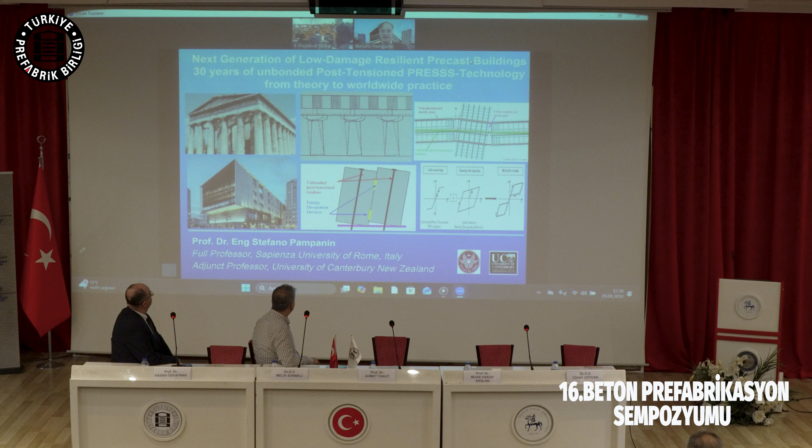So this is a road map of what I would like to give you, a little bit of a summary of quite a number of years, 30 years. But if you see on the left-hand side, this technology probably dates back 3,000 years, 2,500 years, depending on which country. The monolithic temples which were doing rocking could be considered. So everywhere in the world, people were using this sort of technology as a seismic resistance.

So we will be going in 30 years in a fast track summary, from the concept of rocking from the Greek temples, that's the concept of what they were doing in the past, to the concept of controlled rocking, using cables, post-tension cables. And by the way, marble is concrete, marble is prefabricated. So there was a prefabrication in the past which was quite advanced, made of segmental construction. And what we've been doing in the last 30 years is to engineer that very good earthquake resisting structure by using vertical post-tensioning in the columns or in the walls, and horizontal post-tensioning in the beams. What is the novelty? The post-tensioning to work as a spring, a controlling spring, so that they should be at least locally unbonded, not bonded.

And on the bottom side, you will see one of the buildings, which is probably even behind me as a screen, which has been co-designed and reconstructed in New Zealand. It's one of the latest low-damage technology, an iconic building, the Central Library, after the major earthquake in 2010-2011.

Professor Khan was asking me, can you please give a brief bio of yourself? And I was preparing a bio, then I sent a text, but the bio here is not really about the context, it's about a journey. And I would like to show you the journey of this technology using my story, because that has been basically my life.

So the first 28 years, University of Pavia, Milan. Why is this connected, linked to precast technology? At University of Pavia with Professor Macchi, my mentor, I was working on rocking of the columns of the Leaning Tower of Pisa. So it was already looking at finite element modeling and trying to understand how this mechanism can actually benefit. The rocking of the columns of the Leaning Tower is actually a pure rocking, there is no control.

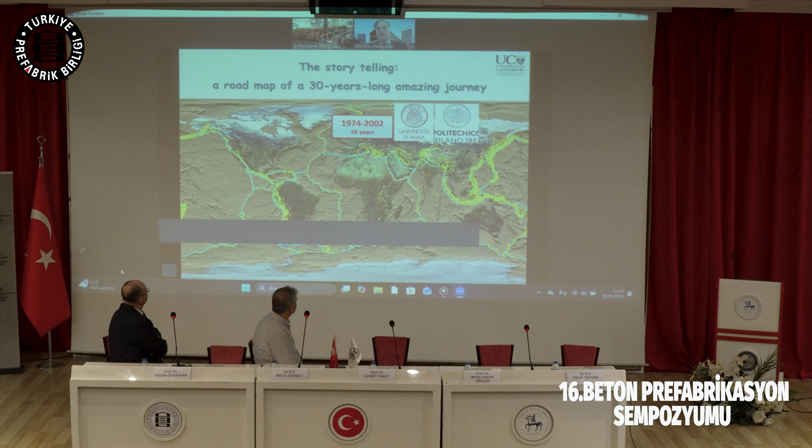At the Technical University of Milan, where I did my PhD, I spent as much time as I could working, having the honor to work with Professor Nigel Priestley at University of California, San Diego. That's where it all started in terms of learning the ropes of precast seismic structure systems, which is the PRESSS technology.

I came back to Pavia for a couple of years at external lectures. I had the opportunity to go to New Zealand for 3 months, invited by Professor Park, informally, and more formally by John Berry, who was our technical engineer. The 3 months became 16 years. Over there we really pushed very much on developing further and further, with several applications, the technology itself.

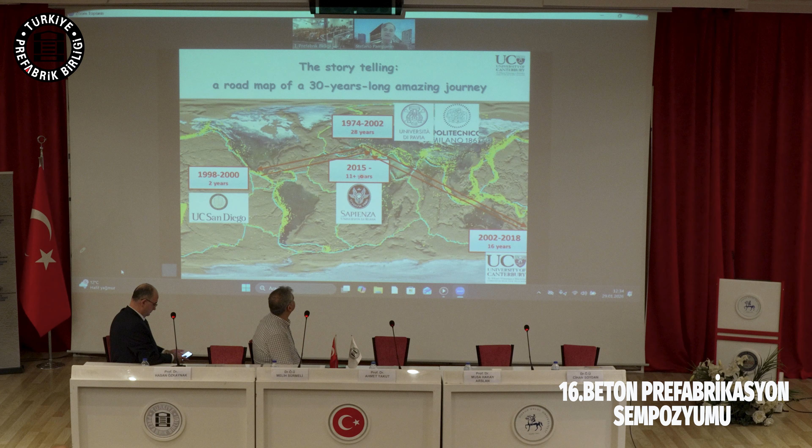Where I'm calling you from now is Italy, but not from Pavia anymore, it's from Rome. In the last 10 years in Italy we've been working on a combination of low damage with energy efficiency - low damage for new design and energy efficiency for both new design and retrofitting of existing buildings. We are using low damage technology, and then combining it with energy efficiency.

Now, I assume, looking at your very interesting symposium, that during the 2 days you have been going through the development of precast in seismic regions, but I want to give a snapshot of what was the situation in the 1990s and what is typically the situation today.

In the 1990s, the situation was not very different from now. The use and development of precast was limited. There was a lack of confidence on the performance - the Northridge earthquake, precast car parking, industrial buildings, I'm sure in Turkey too - we know we had problems with car parking everywhere, precast concrete industrial buildings everywhere.

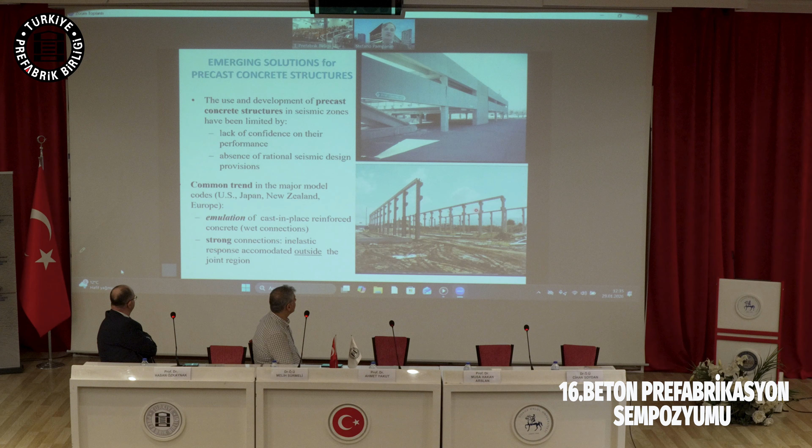Unfortunately, the 1999 earthquake in Turkey was a wake-up call for everyone. There was a lack of seismic design code provisions, a lack of university courses, a lack of information in the area of engineering and architecture.

The trend in major codes - US, Japan, New Zealand, and Europe - was typically to allow precast concrete only if you were doing an emulative approach, a cast-in-situ approach, so a wet connection of precast or semi-precast elements, or a strong connection. The hinged connection, as we could call it, is the typical precast industrial building approach as we were doing in the European environment, Southern Europe, and everywhere else in the world.

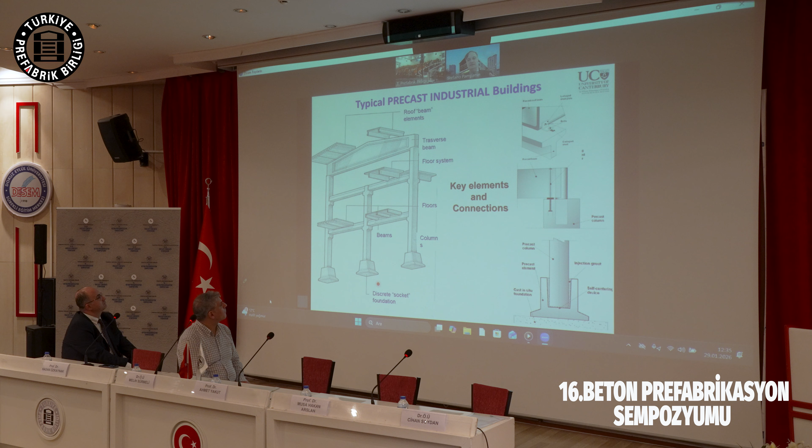It's very strong, very efficient from a gravity loading perspective, but not very good from seismic resistance - and we learned that. What are the advantages? Fast and quick, it's dry, it's fast, it's quality controlled. So with a dry connection we have all the benefits of precast - speed of erection, everything goes up like a Lego system. But if we have connections typically hinged, with a couple of rods vertically and a socket foundation, we have a very inefficient static scheme.

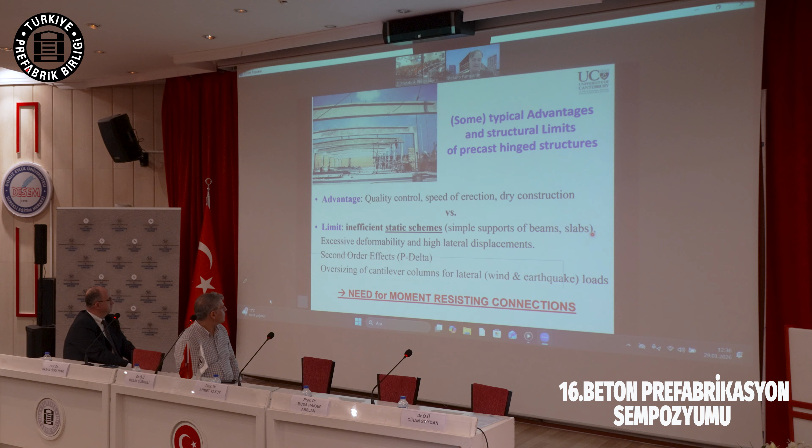So basically we have to over-design the foundation, over-design the column because they become cantilevers. We need to limit the displacements, we need to limit the deformation. So the whole system under seismic regions doesn't work very well. We like dry connections, but we need a moment-resistant connection. That's where, over the decades, the emulative approach came into place.

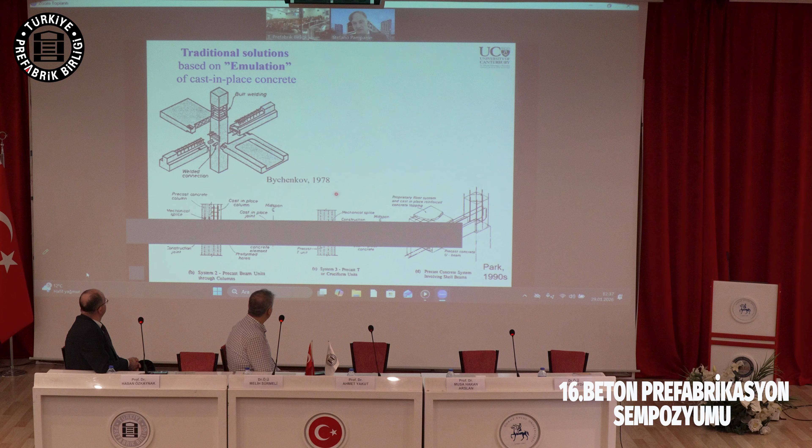Because we needed a moment-resistant connection, there's been a lot of development of the emulative approach. You know this well because Turkey is doing very well, but I'm speaking about the world. In the ex-Soviet Union, East Europe, there was already in the 1970s precast wet connections. New Zealand in the 1990s, Bob Park et al., precast connections cast in situ, wet, in some regions. This is a publication from FIB by Fumio Watanabe showing that in Japan, and also in approximately all the FIB countries, precast connections were cast into the core of the joint, or at the midspan of the beam, or somewhere far from the beam - so we were having cruciform elements or beams supported on columns.

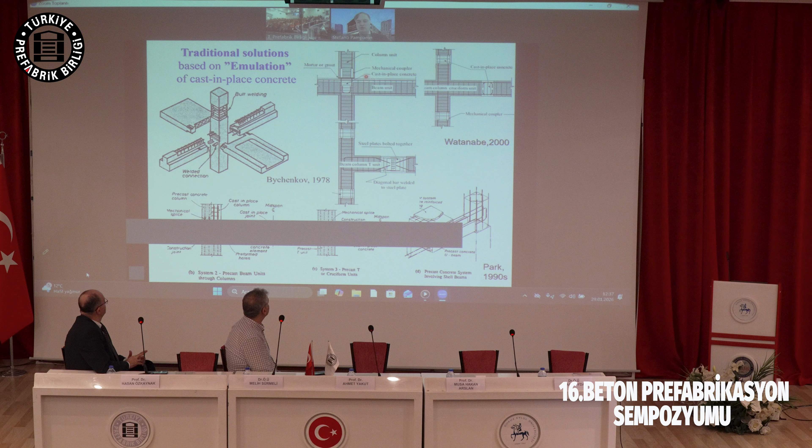Examples we know well: double cruciform vertical in New Zealand, double cruciform horizontal in New Zealand with the wet connection. This, from FIB, refers to the Turkish approach - very good - for precast concrete industrial buildings, where there are wet connections instead of only dry connections.

So all very good because we are giving a moment-resistant connection, but how do they perform in a real earthquake? Well, they will perform as cast-in-situ concrete performs - they will try to develop a plastic hinge, they will try to develop a mechanism for ductility in the wet connection or the emulative connection itself.

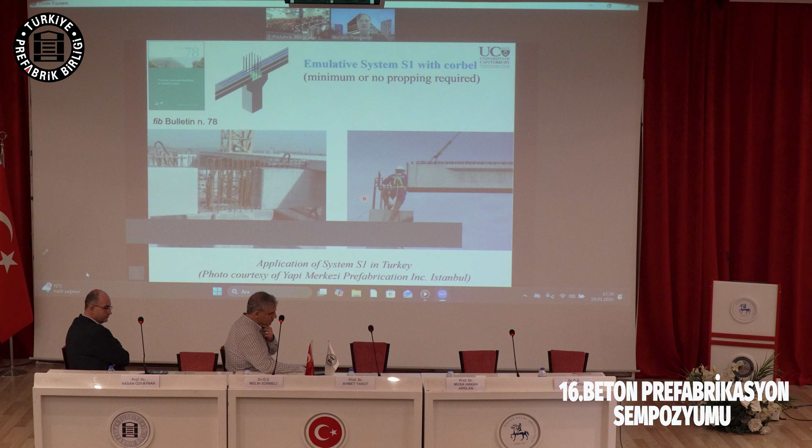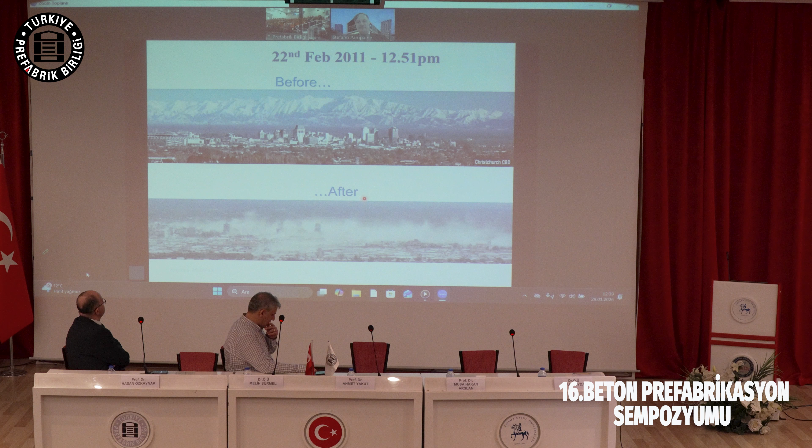And we had, unfortunately, a very important experimental test that we didn't want to have, in 2010-2011 in New Zealand. Christchurch, New Zealand - the city was destroyed in the central business district by this major earthquake, especially the aftershock of 22nd February 2011. So we are 15 years after - on 22nd of February 2026, in a few weeks it will become 15 years after.

This is one of the best slides that I've been showing for years, literally for years, starting from the 1990s, to speak about the fantastic examples of prefabrication emulative that New Zealand was able to develop around the world for a 22-story building. This building went through the earthquake.

How did it perform? It did exactly what it was meant to do. It developed a plastic hinge, so again it's a precast emulative approach, which is emulating cast in situ, is going to form a plastic hinge in the beam, is going to deform and provide ductility through damage. So by having ductility through damage, we are saving lives.

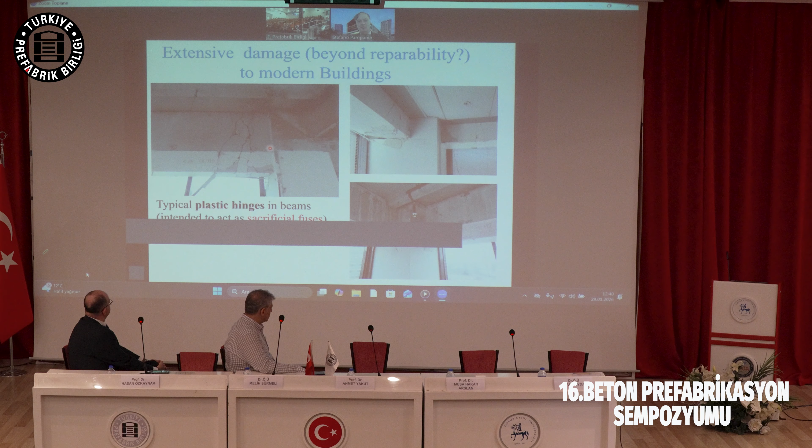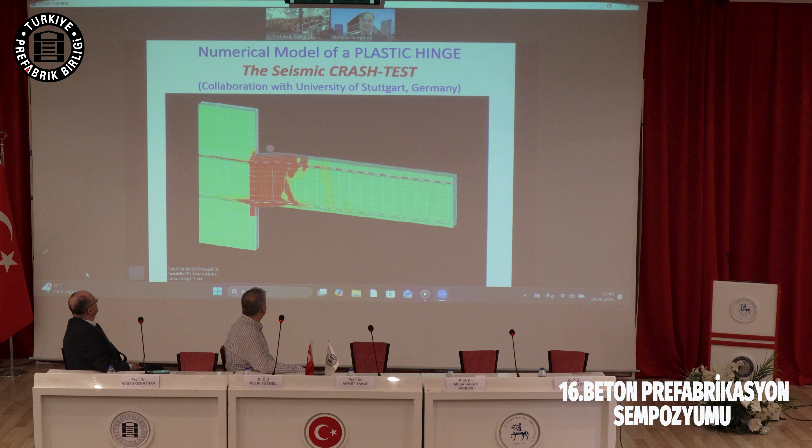So these plastic hinges were the sacrificial fuses of our building. But what was the consequence of it? The consequence was to have a car crash test. A building like a car crash test will deform plastically, and this means that we are not able to repair it. As a consequence of something that we can model, the seismic car crash test, people should know, or if they don't, we need to tell them that we are able to model the plastic hinge.

This is the seismic design of the minimum by code in all the best codes around the world. What happened to that building and to many other well-designed buildings according to a well-designed, well-detailed plastic hinge? Those buildings had to be demolished because we did not know how to repair a plastic hinge.

So let me go back. Precast is fantastic. Precast pre-stress can give you an excellent quality control, a speed of erection on long span. But in seismic regions, we discovered that simply supported beams on columns, socket foundation alone, are too flexible. We need moment resistance. Moment resistance can be provided by cast in situ, wet connection, emulative of precast connection.

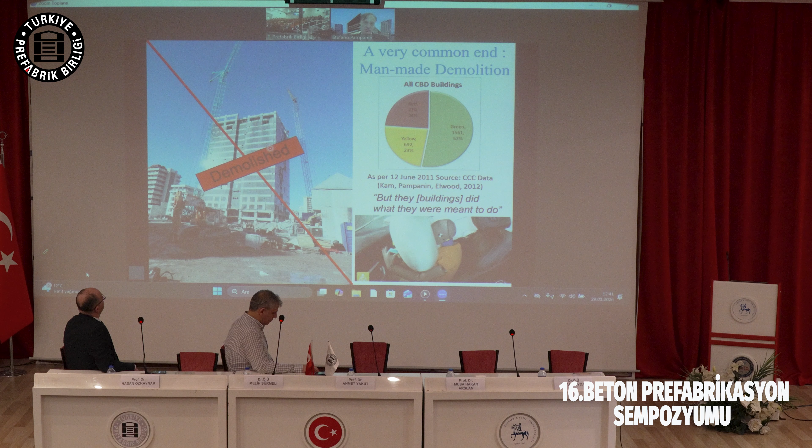But once we get a real earthquake, we get to the same problem of cast in situ concrete, which is developing a plastic hinge, which means that we are not able to repair it. So imagine the cost of a multi-story building like this.

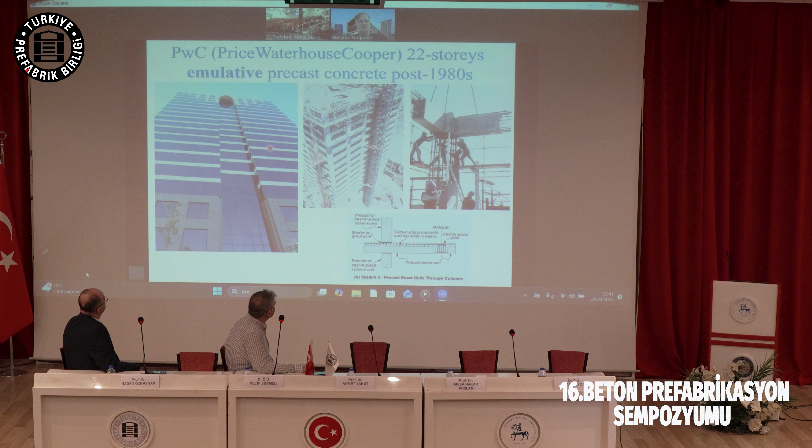This was actually an 80 million New Zealand dollar building, and it was not possible to repair it. So the loss is humongous.

And if you have insurance, which I know Turkey is also developing, you might be fine financially, but you will not get your life back with the insurance. Not in the sense that you have lost life, but in the sense that the comfort of your living will be completely destroyed. And that's the city.

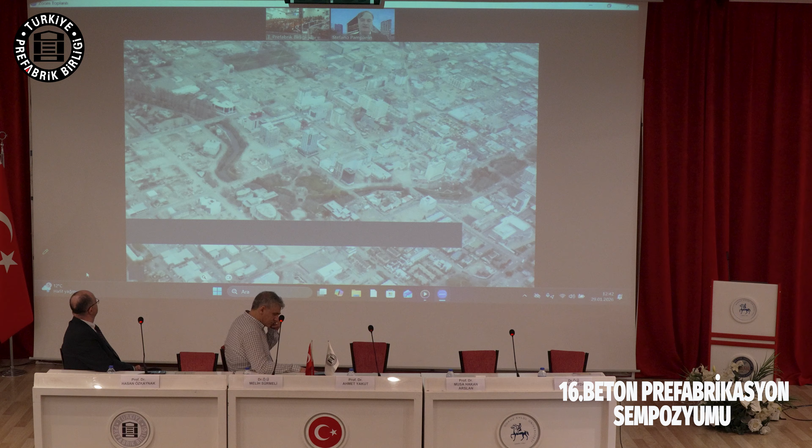The city of Christchurch, completely underdeveloped, completely taken down by controlled demolition, with 185 fatalities and 50 billion New Zealand dollars of cost, which means 30% of the gross domestic product.

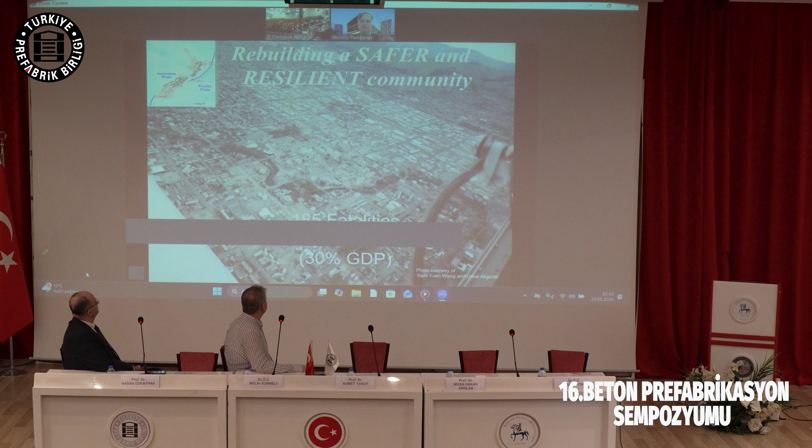It's to go back to the past, and we go back to the ancestors. They had earthquakes, they developed temples, buildings, made in precast. It's not concrete, but it's very similar to concrete. There's no steel inside, so it's only acting as a rocking system. I have all the links that you can use for references of this video and explanation.

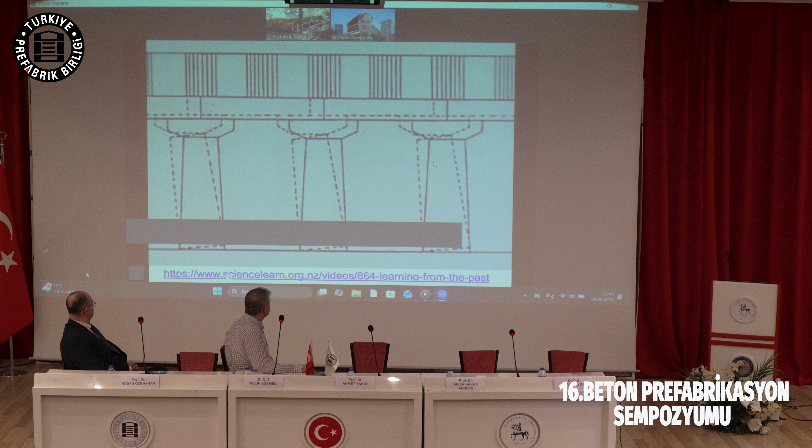This was becoming part of, as I mentioned, my thesis on rocking with finite element in the 1990s. And then the point is, can we learn from those technologies and use them in a new generation of low damage precast concrete technology? And that's what happened in 1999.

So in the 1990s, the Precast Concrete Institute in the United States, PCI, developed a new program, a big investment to launch, to revamp the use of precast concrete in seismic regions. Because precast concrete was losing market. People were not happy with the performance of simply supported beams on columns, hollow cores, not properly detailed. The problem was not precast, the problem was detailing.

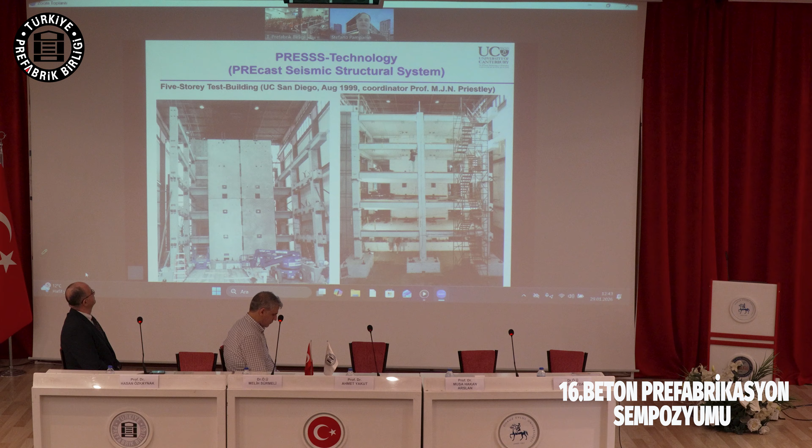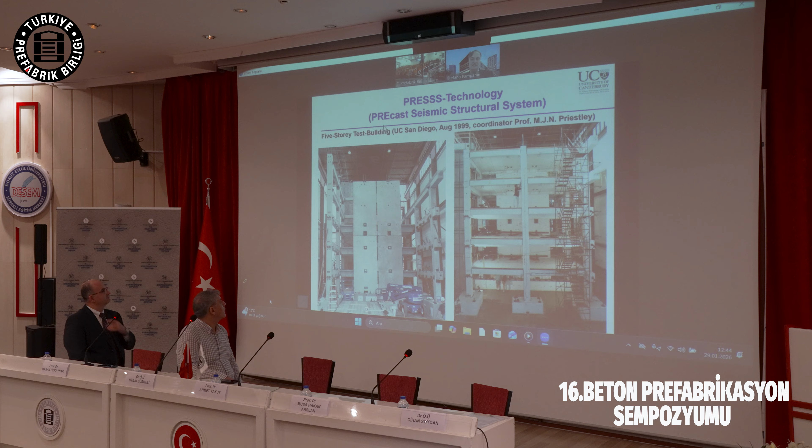The problem was connection. So this is an example, this is the end of the PRESSS program. That's why we call it PRESSS technology. PRESSS stands for Precast Seismic Structural System, coordinated by Nigel Priestley. I had the honor, 26 years ago—myself 26 kilograms ago, I joke all the time—many years ago and many kg ago.

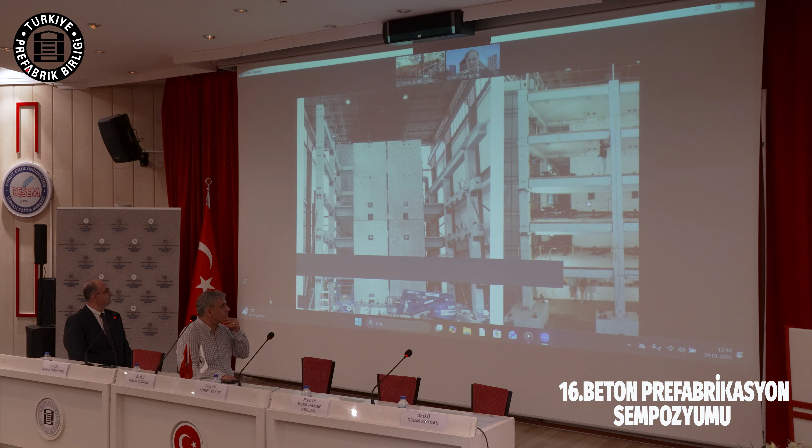And these are precast panels with vertical post tensioning, and these are frames with vertical post tensioning. Everything is unbonded. So how does it work? These are dry, jointed ductile connections. They are dry, not wet, using all the advantages of prefabrication in a dry manner. They use post tensioning to clamp the system against each other, and during the earthquake there is no forming of the plastic hinge, but there is a rocking.

There is a controlled rocking. Why controlled? Because the more you open the gap, the more the cables will stretch and push back. They act as recentering springs. That can be done for beams and columns, for frames, and that can be done for walls.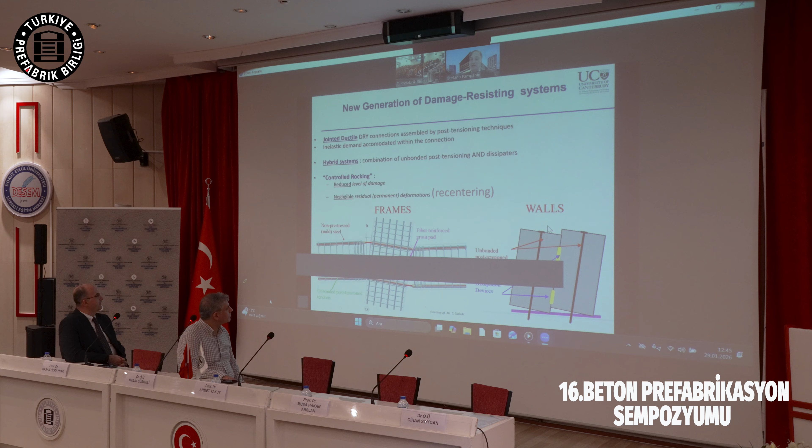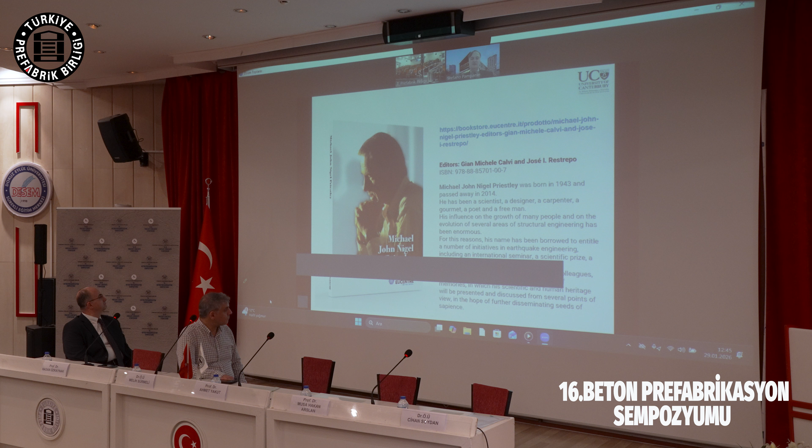I hope you know one of the most cited publications in press technology in this environment, which is Priestley et al., with Sri Sritharan, John Conley, and myself. I was a Fulbright visiting scholar at that time at UC San Diego, and these are the preliminary results of these 5-story precast concrete buildings, which worked outstandingly. If you want to know more about the story of that 5-story building, read the book.

That's a big group of academics, engineers, colleagues and friends of Nigel Priestley who prepared it after his departure, because we wanted to say how much he had impacted the whole environment in terms of science, but also in terms of people, giving credit back. In one of the papers, I was coordinating the story of the Press 5-story building, how it happened, working together with amazing teams like John Stanton, Suzie Nakaki, and so forth. I think it's very interesting to understand the evolution.

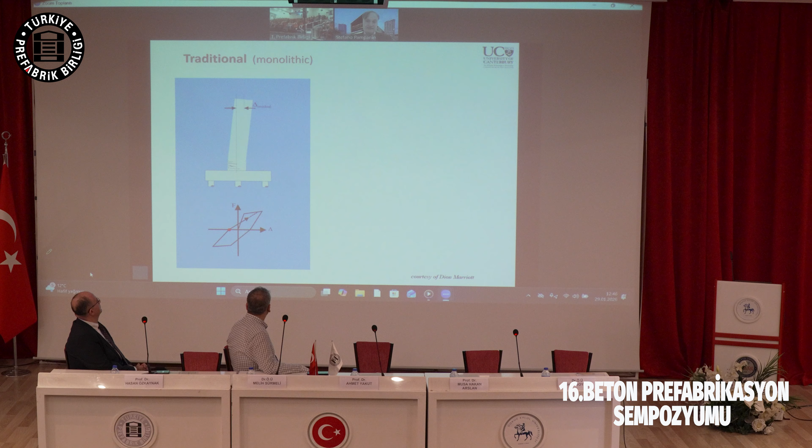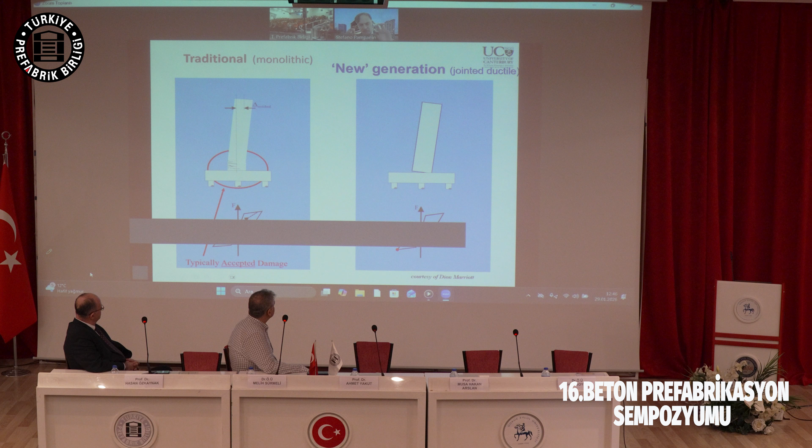So how does it work? The traditional cast-in-situ or wet connection, emulative approach, will have to form a plastic hinge, and then we don't know how to repair it, or it's going to be very expensive. A rocking temple with controlled post-tensioning and dissipation will have a sort of flag shape. So it's going to open and dissipate through either internal or external mild steel bar type dissipators.

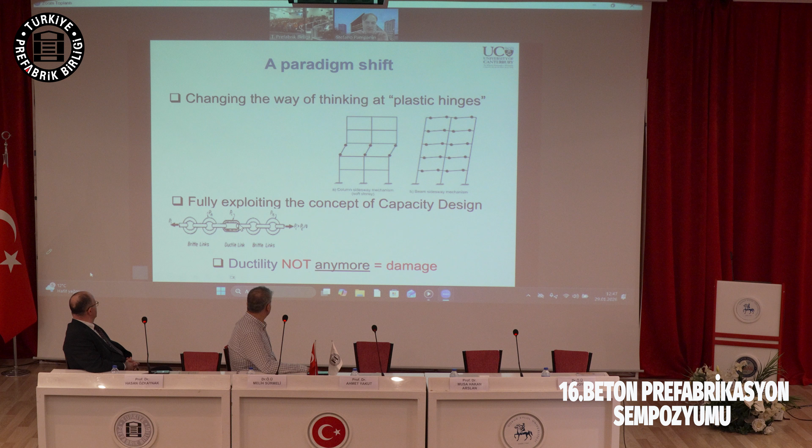The new way is that in the past, in the 1970s, thanks to Park, Paulay, and Priestley, we learned how not to allow buildings to collapse in a soft story, because of capacity design. The column being bigger than the beam, shear being stronger than flexure, creates a fuse in the plastic hinge in a flexural behavior. That was the famous theory of the chain, Tom Paulay's theory, saying there is a weakest link of the chain. The weakest link gives the strength to the chain. The force you can pull a chain with, the capacity, is the weakest link. So if we design the weakest link where we want, then we will have a ductile behavior.

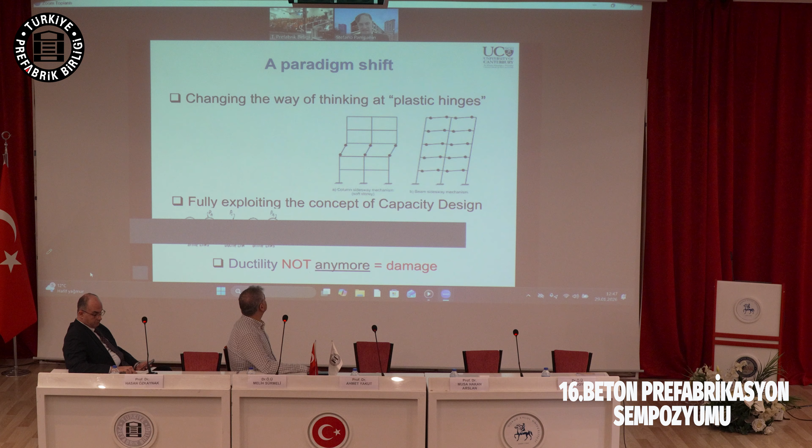But capacity design stands, and the technology has improved. The new technology allows us not to fail a building anymore post-70s, not to have a plastic hinge anymore, but to have a rocking low damage solution which won't leave an irreparable building. There is a new generation now, starting from the 70s, which was a major milestone in earthquake engineering. In the 90s, I'd call that another major revolution, the next generation.

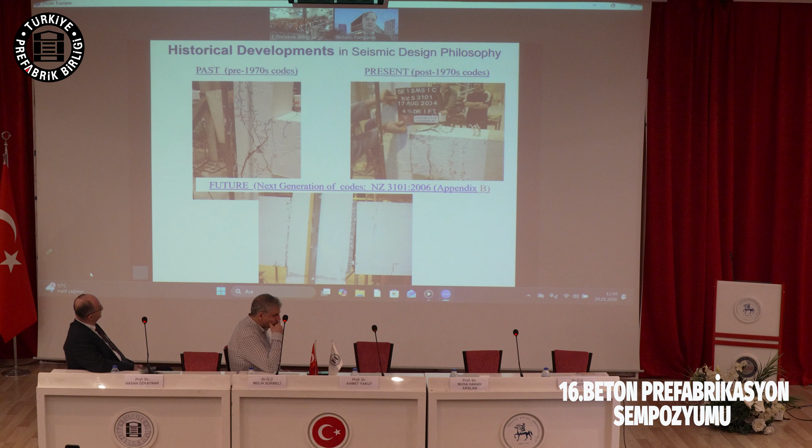What did we do around the world? In New Zealand, in Canterbury, over 16 years, I pushed a lot with my team. It was a fantastic environment, and we developed the next level up, a fuse which can be replaceable. If you leave the bars inside, after you heat them, you don't know how to repair them. So you can move the bar from the inside to the outside.

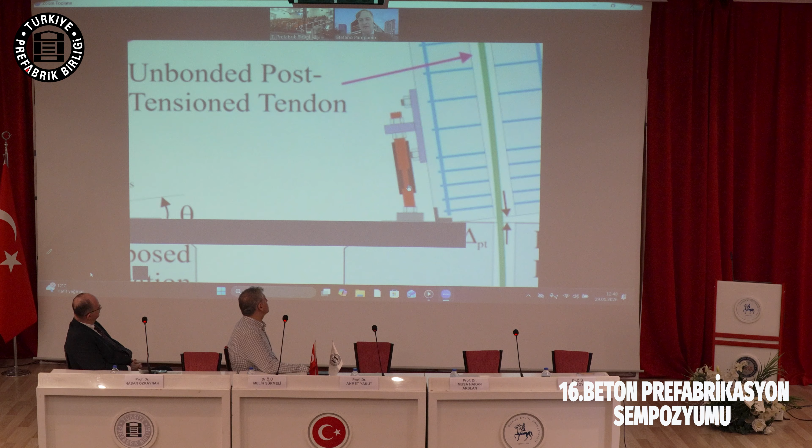You can give that bar a fuse type, a fuse shape. You can insert it into an anti-buckling restraint. Basically it becomes a big BRB, buckling restrained brace, conceptually, which has a plate. In our case, we use a simple rod, made smaller and smaller to become a small dissipator.

We call it plug and play. I decided not to protect it, not to patent the solution. So I'm still a happy, poor academic, because I decided not to make any IP protection, on one condition: please use the name we gave this technology baby, it's called Plug and Play. My name is Stefano, please call me Stefano, because my name was given to me by my parents. So please use it, it's free of charge. How much does it cost? 15 euros. We can manufacture it in the lab anywhere, in a very simple way.

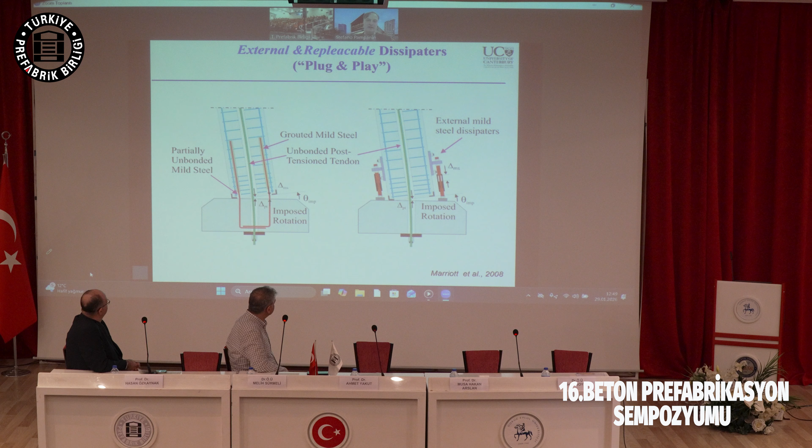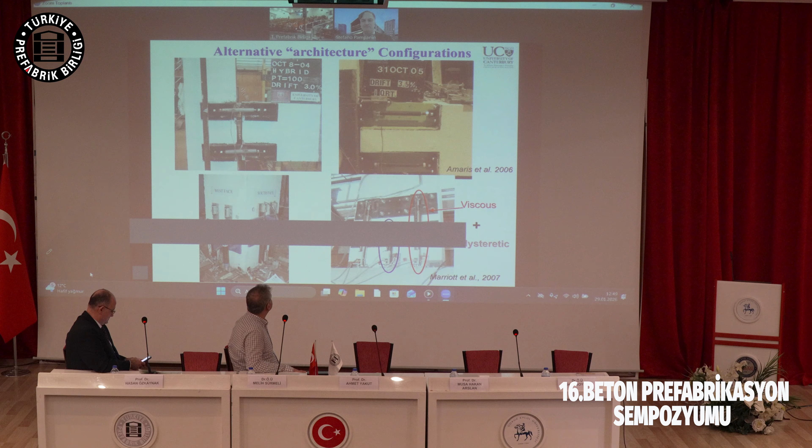This gives you the possibility to plug and play the dissipators easily in a socket, if you wish, at the bottom of the connection. They can be hysteretic, or you can use viscous dampers of different sorts. Their behavior is basically like designing a fuse with buckling restraint, with a cylinder, a fuse, and if you push it back and forth, you get a very stable behavior. They can become an architectural feature. Imagine your building, like what you've already been doing well in Turkey.

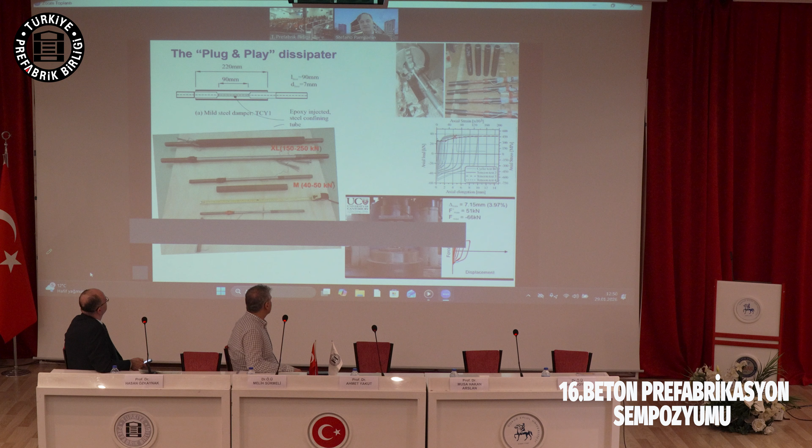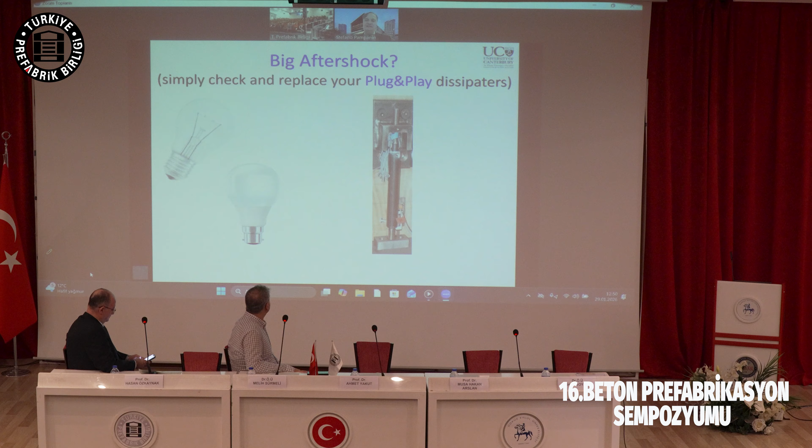There can be space to have some of them in some location around the building. Just as it's easy to change a light bulb after anything breaks it, it's easy to replace a plug and play. So the idea is earthquake engineering with a very simple implementation.

People have been asking, and I know that in Turkey you've been pushing a lot in 2018 with a code on precast, which would allow post-tensioning to be applied. Fantastic, thank you for doing that, it's great to know.

Let's see what was happening in the past. In 2004, the FIB bulletin 27, led by Bob Park and Fumio Watanabe, was already introducing the concept of precast technology.

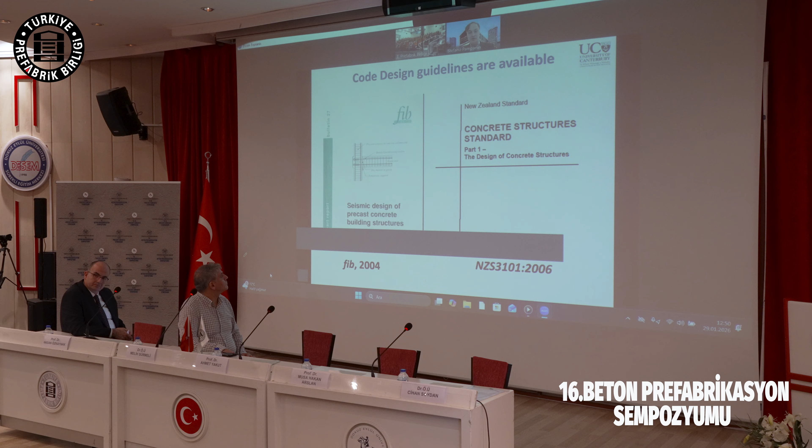In 2006, with Bob Park, I was in New Zealand, and we managed to prepare a full concrete code discussing precast technology. So the precast technology has been developed in the New Zealand code since 2006. In Europe, you can use the New Zealand code. In the States, you can use the New Zealand code. In Japan, you can use the New Zealand code for alternative design.

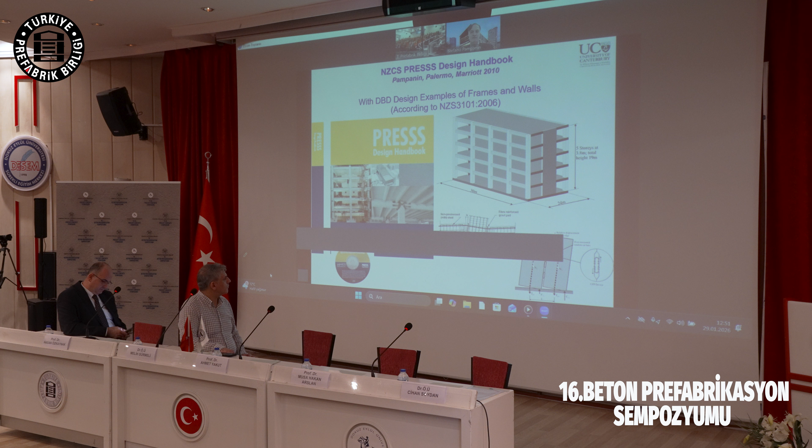So then we developed a design handbook, specifically for New Zealand design, but it can be adopted - I use it in my teaching for other designs - going step by step through the connection, through the calculation, and so forth.

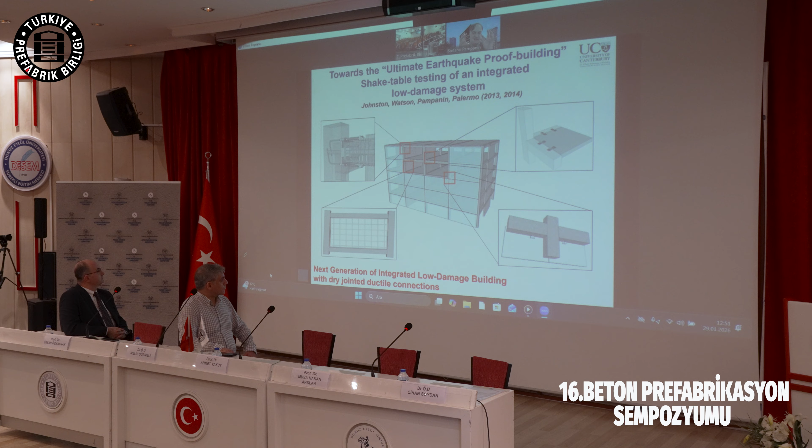So we already said what is changing, what has been the novelty. The novelty is that in 15 years of work, we started working on the full package. Not only should the structural skeleton be low damage, but the full facade, the full diaphragm, the full partitions - the whole system should be low damage.

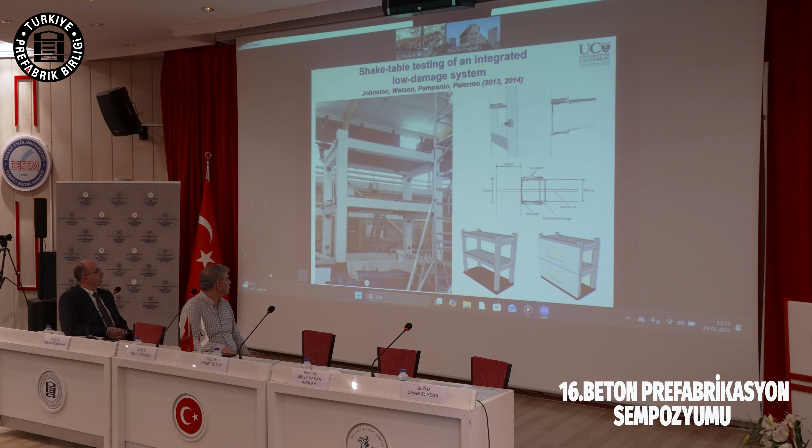So here we developed a final testing after 15 years on the shaking table in New Zealand, and I want to show you if it's working. Let me see, hopefully. I will send you the next slides and try to record it. You will see quite a number of experimental tests where we are able to see this rocking happening - it's absolutely, I can tell you, unbelievable.

So, interestingly enough, people are expecting to have a seismic-proof building, an earthquake-proof building. But when they see that, they are not believing that it can be done.

So the presentation, and I'm closing, has a number of examples of real buildings that we designed and constructed in New Zealand - multi-story buildings for offices, for the central library, for universities - and there is plenty of application around the world, including Costa Rica, including Turkey, including the US, and so forth.